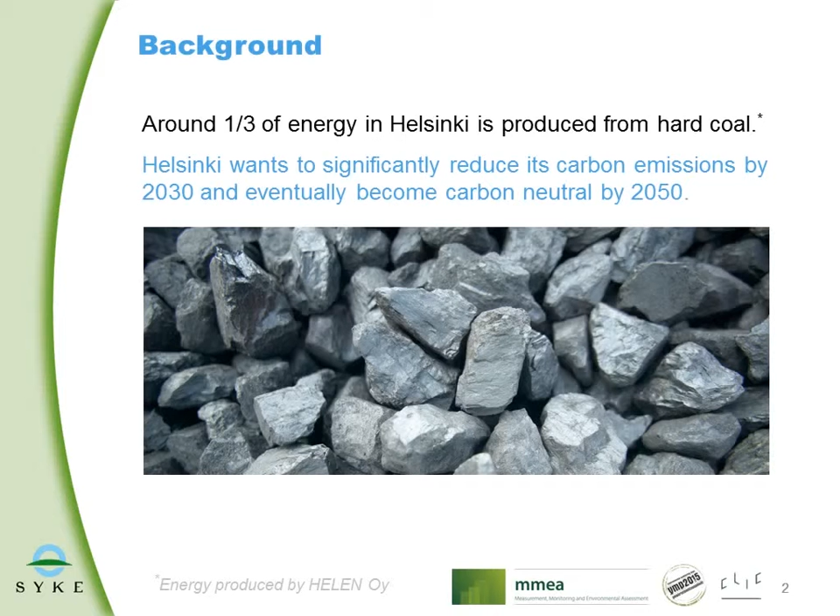Everybody did their own share. The background of our work was that around 1/3 of energy in Helsinki, I don't know if that is true still, is produced from hard coal, and Helsinki wants to become eventually carbon neutral by 2050, and before that reduce carbon emissions quite significantly. And the idea was, could coal and wood pellets co-combustion be part of the solution?

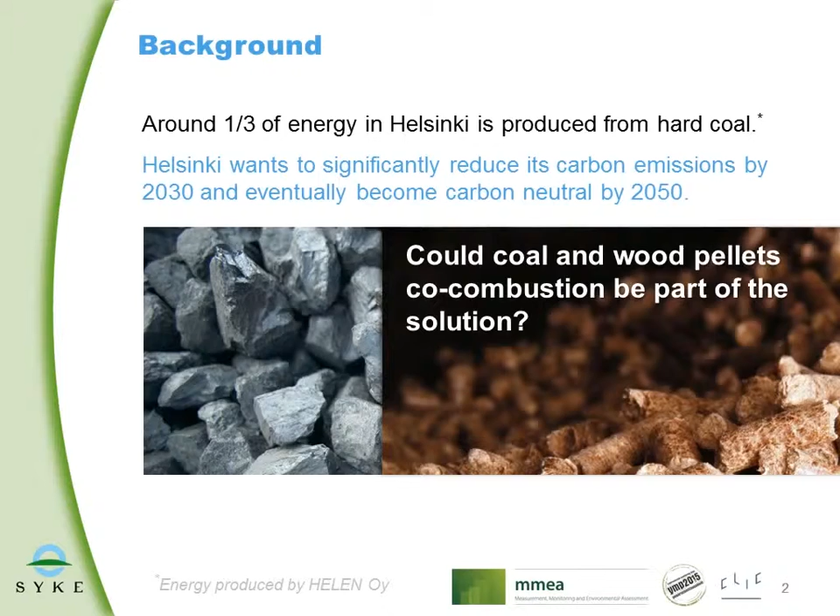The aim of the study and the methods were as follows. So we want to perform life cycle assessment, LCA, of the operational phase of an existing power plant for different scenarios. Operational phase means that we didn't look at the physical infrastructure of the power plant, but only on the operation, fuel supply, and direct emissions.

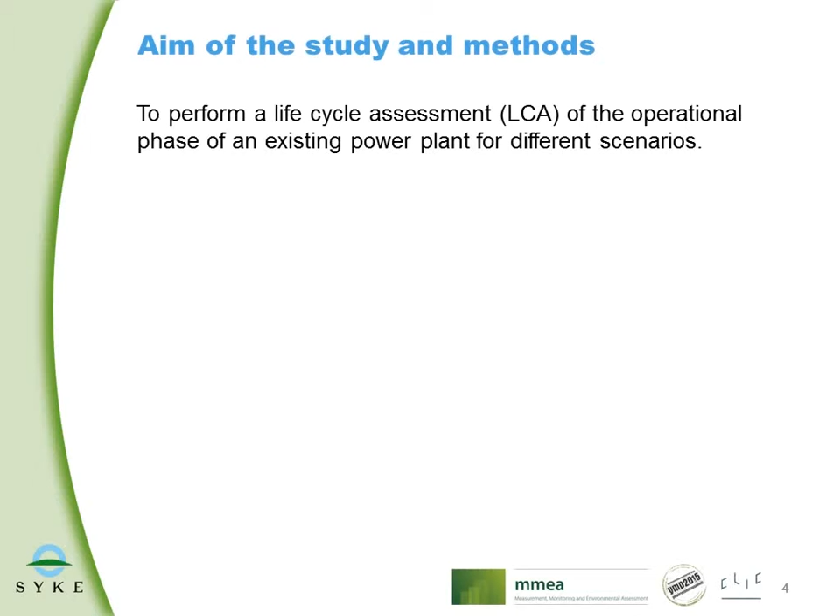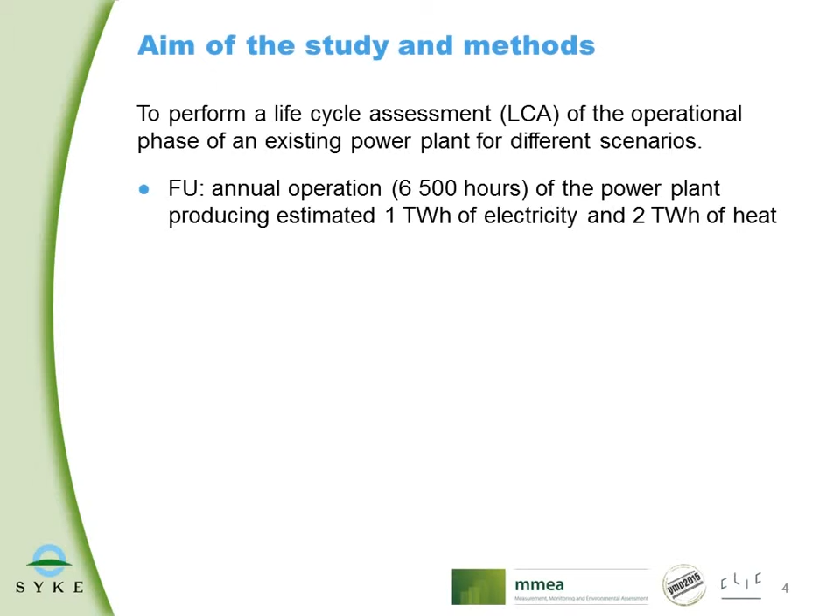The functional unit was defined as annual operation of the power plant, 6,500 hours, producing an estimated 1 terawatt-hour of electricity and 2 terawatt-hours of heat. This case was partly based on the real data, but of course was adjusted. This is a model. This is not a real case scenario.

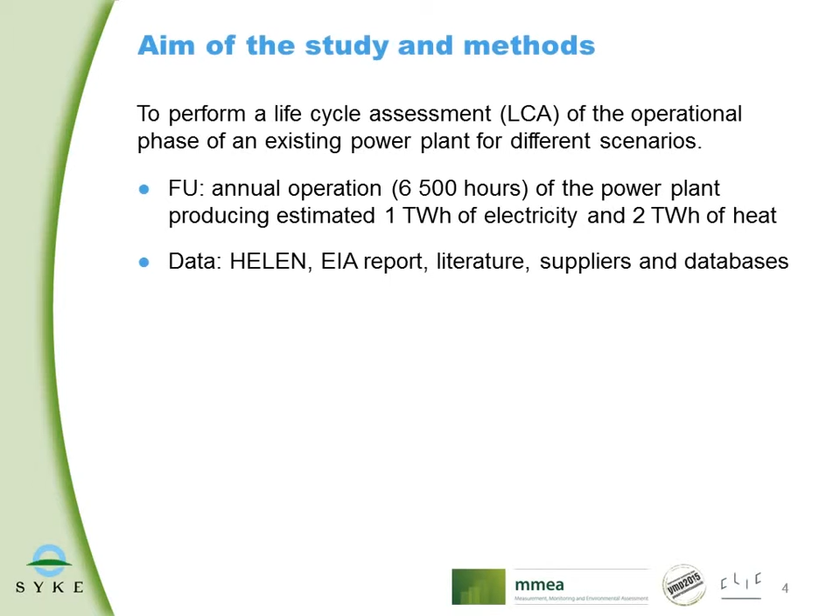The data came from Helen, from the environmental impact assessment reports, from scientific literature, from suppliers of fuels, and from various LCI databases. The impact assessment in this study was performed according to ReCiPe midpoint impact assessment, and the following 5 impact categories were selected as relevant for this case. So it was climate change, fossil depletion, terrestrial acidification, photochemical oxidant formation, and particulate matter formation.

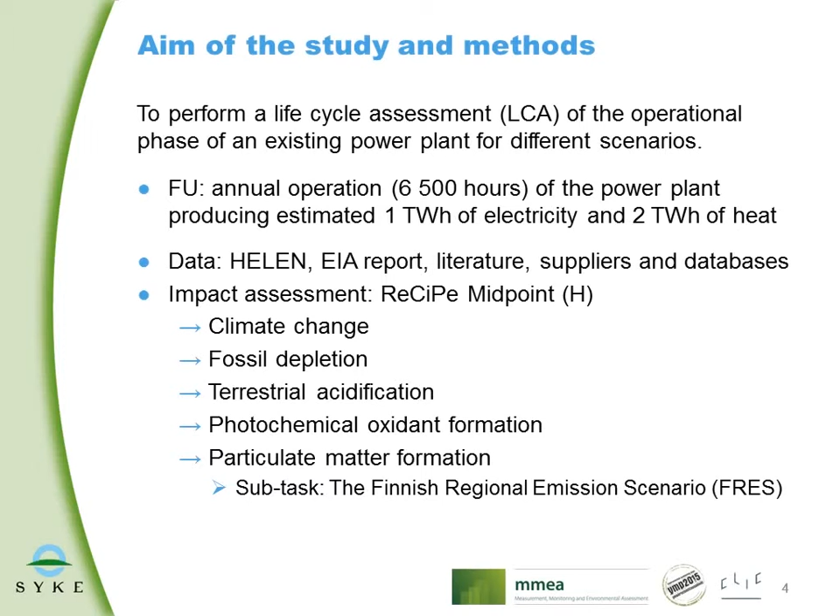For particulate matter formation, we had a subtask in our work to look at the wood pellets supplied by trucks and apply the Finnish regional emission scenario to figure out whether transport of pellets would make a significant difference to fine particle emissions within the city.

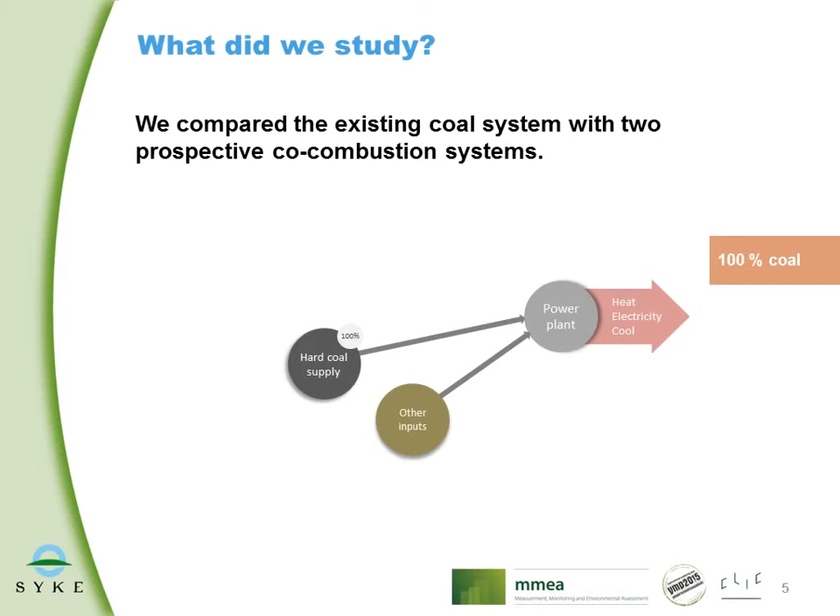So what did we study? We compared the existing coal system with 2 prospective co-combustion systems. We had a power plant, Salmisaari, producing heat and electricity from coal, and the base case scenario was 100% coal combustion. So that's basically the situation until like a year ago. So 100% of fuel is supplied from hard coal.

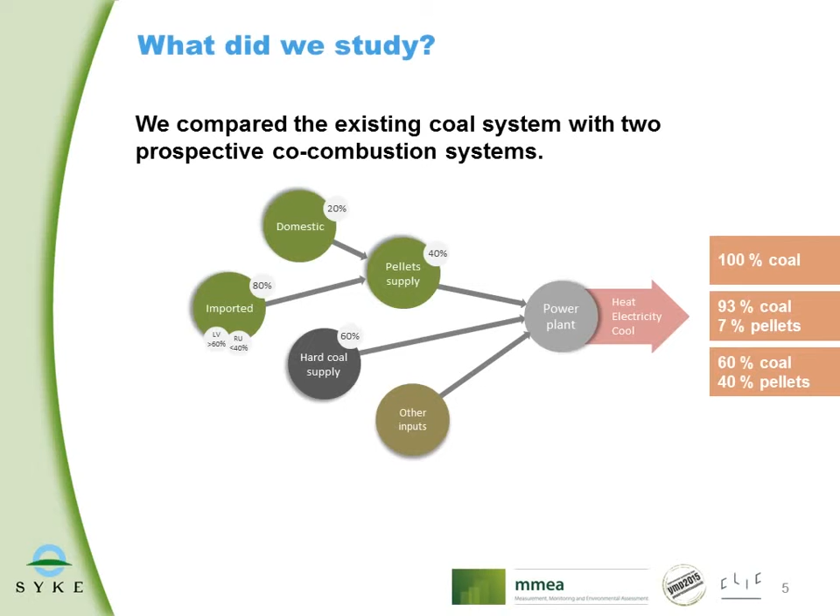And then the first prospective scenario was the 7% pellets co-combustion scenario, where 7% of energy in fuel would be supplied through domestic wood pellets. And then the second prospective scenario was defined as 40% pellets co-combustion, where a minority of those pellets would be domestic, and most would be imported from Latvia and from Russia. So these are the 3 scenarios.

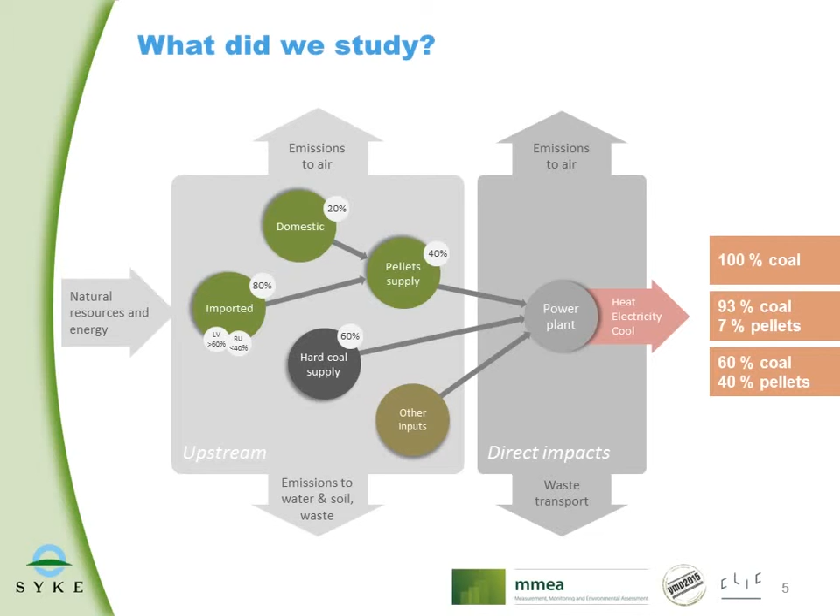On the left side, you see the upstream or those indirect processes which contribute to the indirect emissions, and on the right side there are those direct impacts or emissions.

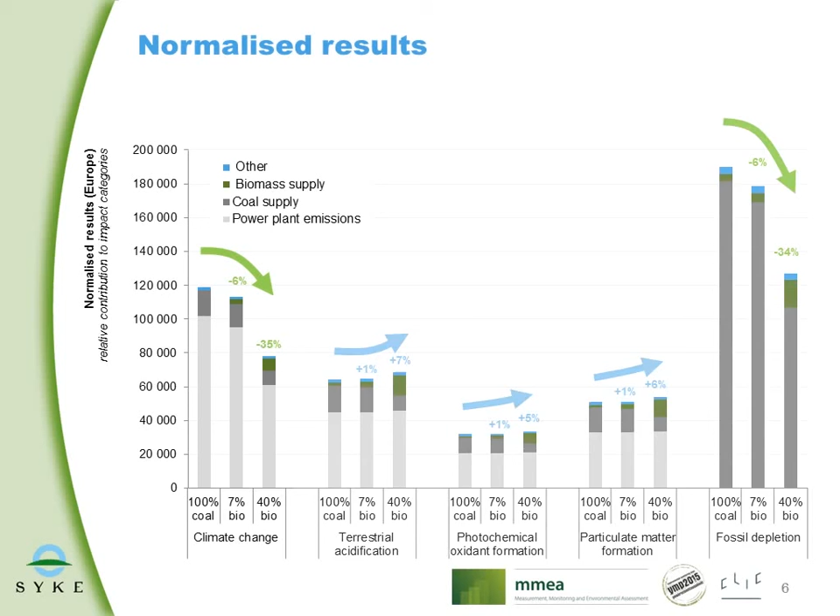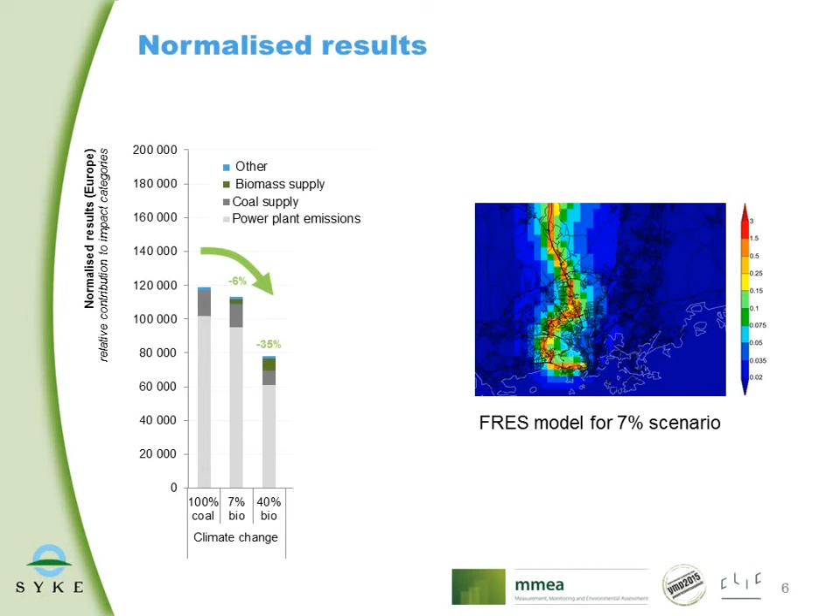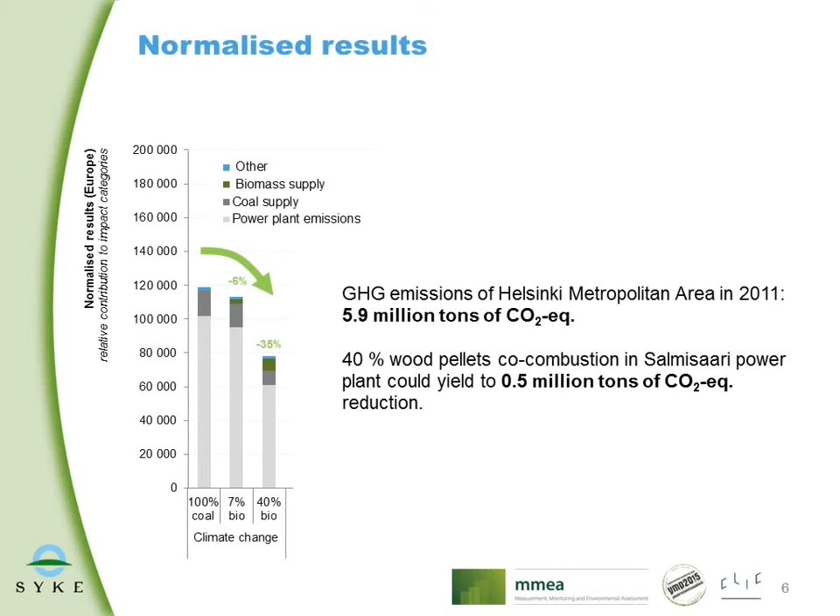Just to put into perspective these results of the climate change impact category, greenhouse gas emissions of the Helsinki metropolitan area in 2011 were about 6 million tons of CO2 equivalent, and this 40% co-combustion scenario could yield about 500,000 tons of CO2 equivalent reduction. So that's pretty significant.

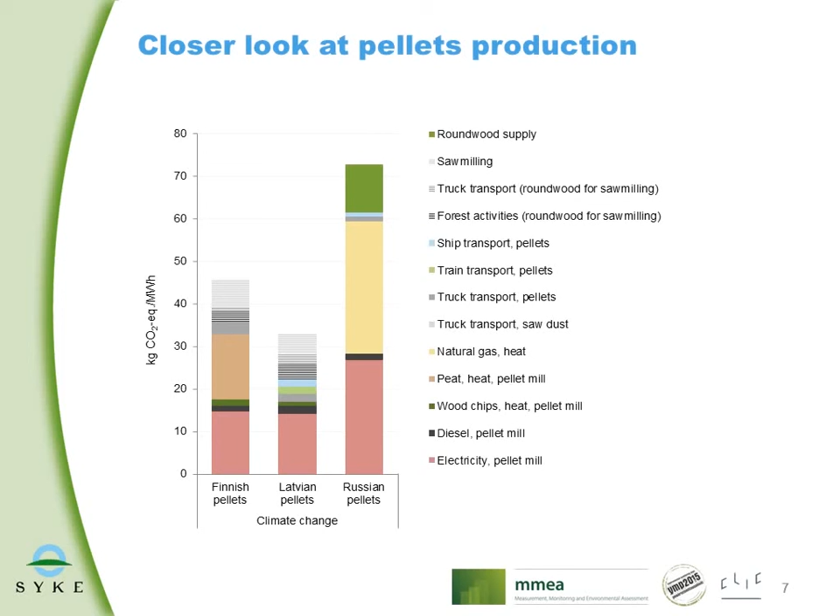The other difference is the type of energy which is used for drying sawdust in the wood pellets production. In case of Russia, that's the yellow part of the bar. Natural gas is used, and quite a lot of it. In the Finnish case, that's the brown part of the bar. That's peat consumption, burning of peat in order to dry sawdust. So you can see that the type of heat which is used in pellets production really matters.

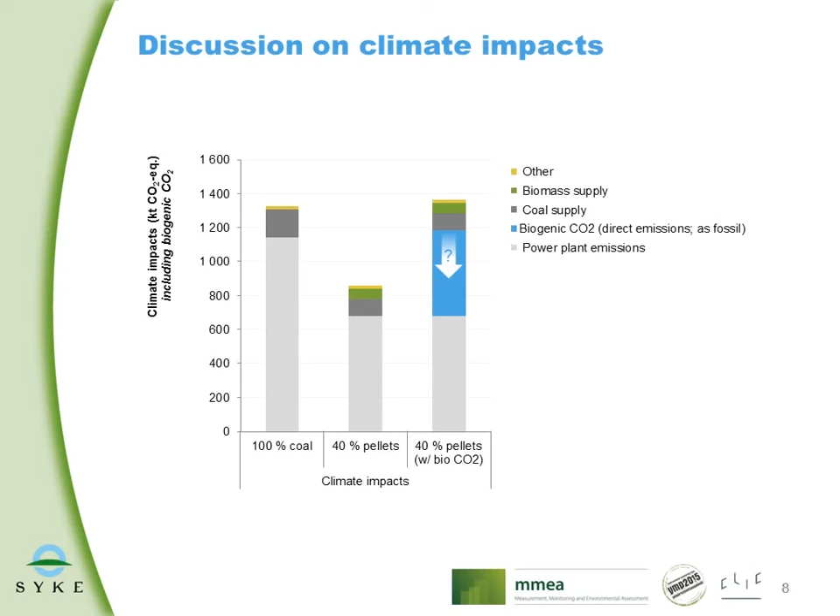A few take-home messages. Life cycle assessment helps to avoid problem shifting. We are looking at several different impact categories at the same time, and we can see what kind of impacts can be observed based on the decision we make, and we can try to optimize the system so that the environmental impacts would be decreased equally.

The origin of wood pellets and their feedstock matter. That was the figure where I showed you Finnish, Latvian, and Russian pellets. Feedstock, is it round wood or is it sawdust as a byproduct, so basically waste? And another take-home message concerning wood pellets production is that it's essential to ensure sustainability of pellets production in order to gain the environmental benefits.

So it's not only the energy in drying and pelletizing, but maybe even more importantly, the forestry practices and carbon flows and stocks and albedo effect and other very complicated issues which I can't myself fully understand how those are handled and modeled.

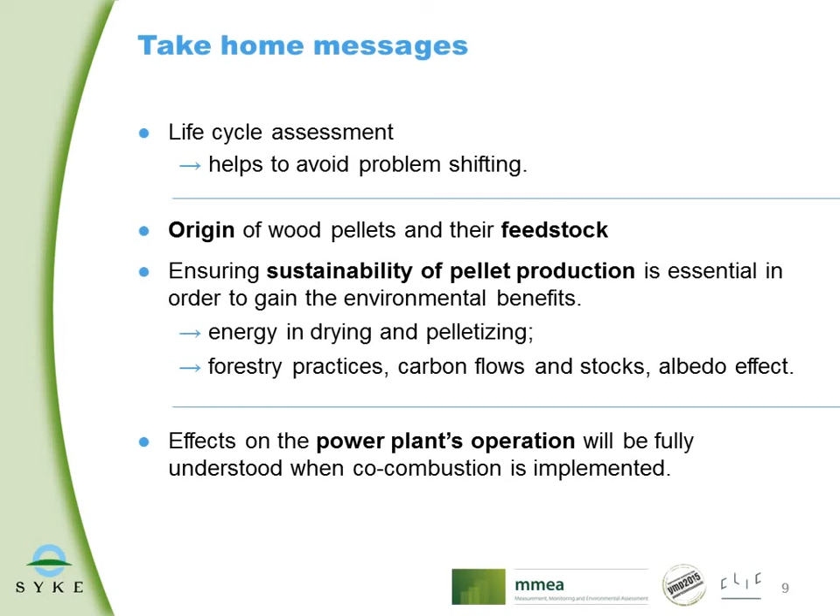And the effects on the power plant's operation will be fully understood when this larger scale co-combustion is implemented. We obviously didn't have data on direct emissions of the higher share co-combustion, so only the future will tell. Thank you.